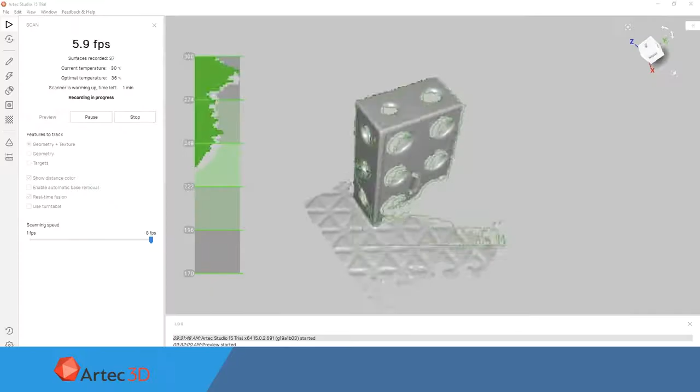Today we're going to take a look at scanning a 1-2-3 block with an Artec Space Spider. So we're using Artec Studio 15 here, which was just released. And what we really wanted to do was do a very simple gauge repeatability and reproducibility study, or a GR&R study, with the Artec Space Spider in Artec Studio 15.

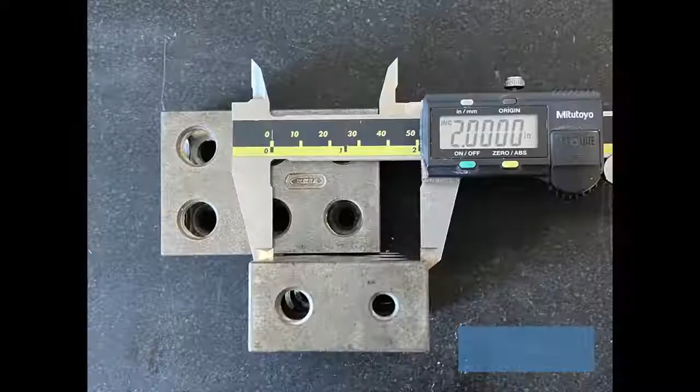So to do this, we decided to use a 1-2-3 block for the analysis. Now, a 1-2-3 block, when it comes to 3D scanners, is one of the most difficult things you can do a GR&R study on because of how flat and how uniform the part is.

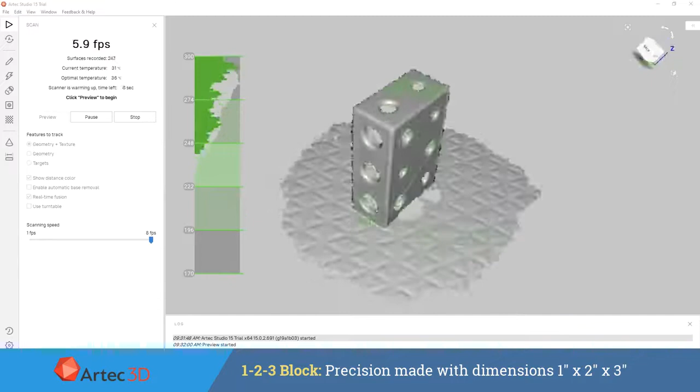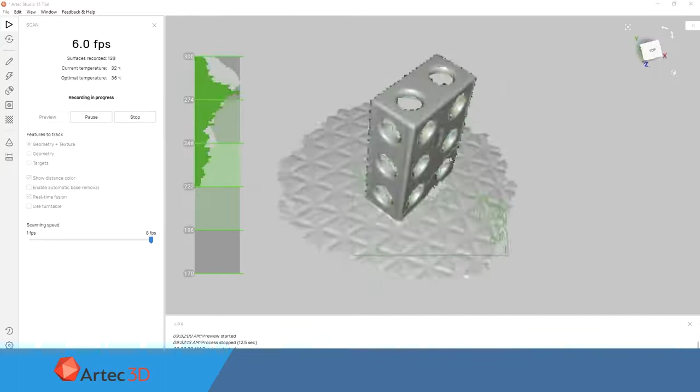Traditionally speaking, with most 3D scanners, this type of part is very difficult to align, as well as very difficult to get repeatable results on because of all the uniform cylinders and the flat planes, and not a lot of external surface geometry that can really be used for referencing when aligning all of the individual frames up from the scan file.

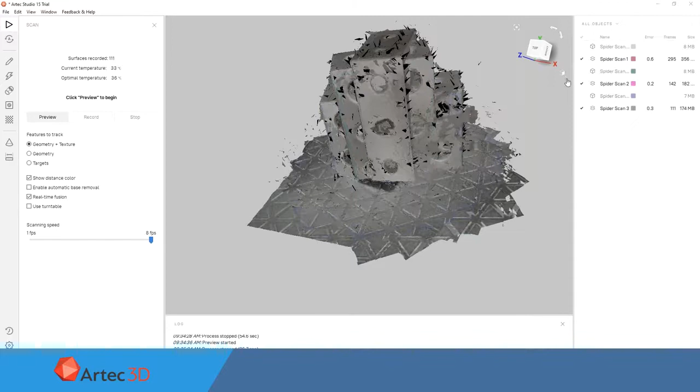So to make this process even more difficult, we are making sure that when we do all of our alignments, we're not using any external referencing data whatsoever. So we're just using the 1-2-3 block here, cutting out any sort of table material that we could use for referencing, and really just focusing on, in the worst case scenario, how is the Artec Space Spider going to perform when we're discussing repeatability and accuracy in its scan data.

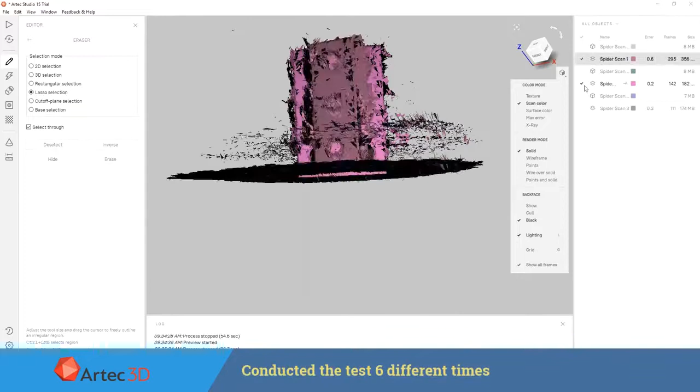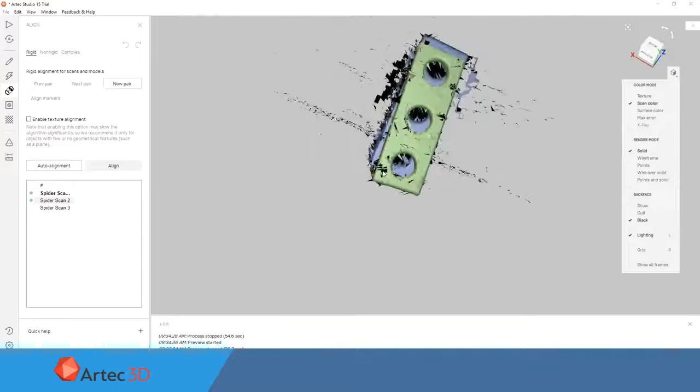So we did this 6 different times, and each time we did scan the part in 3 different orientations, as well as used the same processing for creating our scan files. So the same number of global registrations, the same value inside of those global registrations, as well as our outlier removal processes, and the same resolution in the Sharp Fusion file that was created.

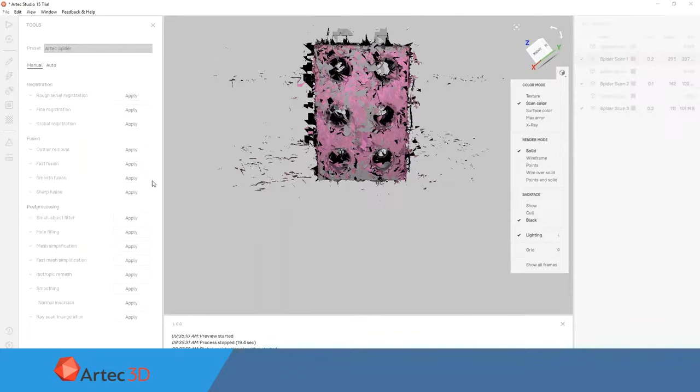So you can see we're just running through here and running our global registration, as well as our outlier removal process to get rid of all of the unwanted noise around our scan file. So at this point, we're going to go ahead and process this out at a 0.3 millimeter resolution, and we'll do this 6 times. However, we're just going to show it once here in this video.

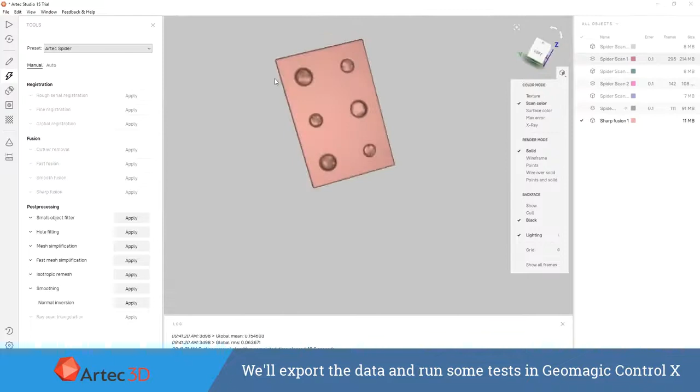We're going to take this part into Geomagic Control X and analyze it a little bit further, taking measurements on the 1 inch, the 2 inch, and the 3 inch mark, putting those in a spreadsheet, and then taking a look at the results. So here we're just going to show the video where we run all 6 of those files so you can see them here live. We are going to speed up through it.

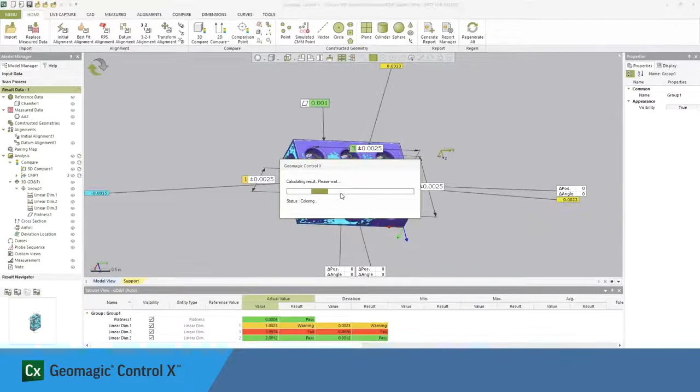And while that's going, we'll talk about a couple of the key factors that we're going to be considering here in this video. So the first one that I already mentioned, which is a 1-2-3 block, is really a great test of alignment performance inside of Artec Studio, as well as the overall accuracy you can achieve in pretty much any sort of scenario with the system.

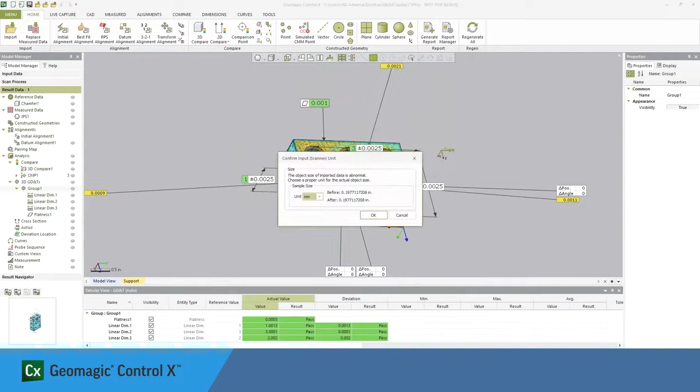The second thing that we're going to focus on is really what are the takeaways from that accuracy, because there's 2 different forms of accuracy that we can consider. One is going to be positional accuracy based off of reference CAD, which will be our 1 inch, 2 inch, and 3 inch values. And then there's going to be accuracy based off of overall scan noise, which we're using our flatness value to drive.

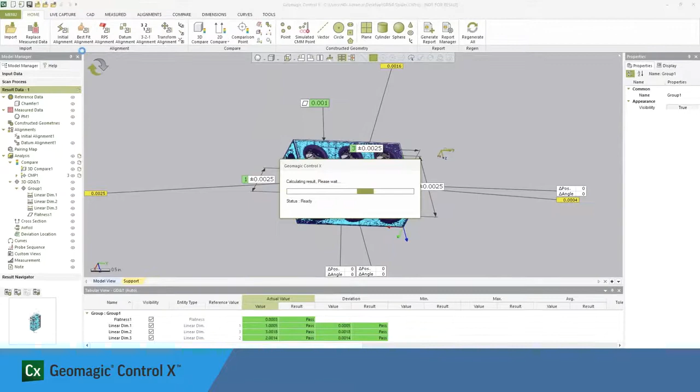There's a few different ways to do this, so don't take this as the end-all be-all message. However, I feel like this is a really good highlight to show the key aspects of performance when it comes to the Artec Space Spider. So let's take a look at the results that we got.

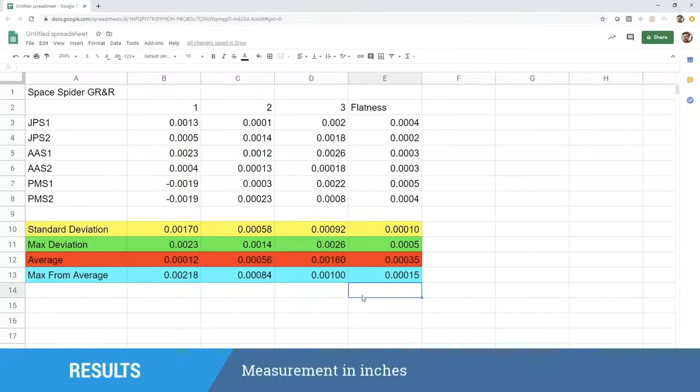And we can see our standard deviation values, our max deviation values, as well as I took an average value and our maximum deviation from our average value, just so that we didn't just primarily use the assumption that the block is 1 inch, 2 inch, and 3 inch. So if we look at our standard deviation values, we can see the highest value that we have on that is right at about 1.7 thousandths of an inch in standard deviation.

For our max deviation value, which would be the maximum deviation from the part if it is precisely 1 inch, 2 inches, and 3 inches, that's right at 2.6 thousandths of an inch on the 3-inch mark. And then if we take our average and look at our maximum deviation from average, we can see the maximum of those values is about 2.2 thousandths of an inch, or 0.00218 inch max deviation.

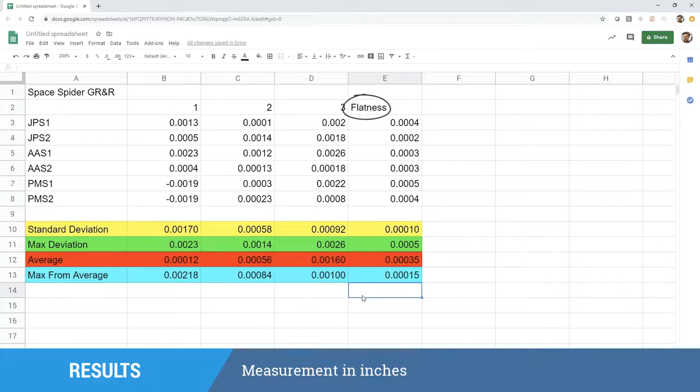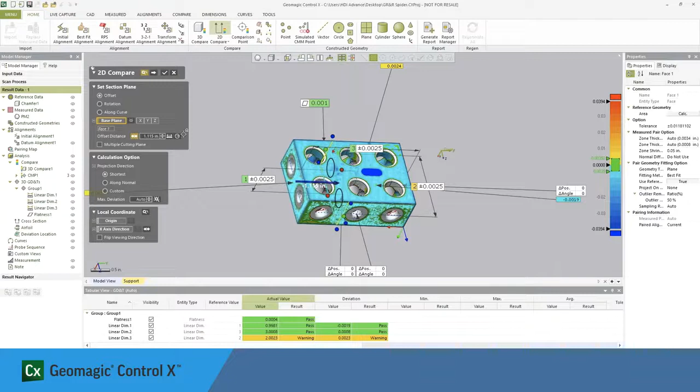However, there's one more value that we threw in there, which is flatness. So let's analyze that flatness value a little bit, because we can see that those values are quite lower than the 1 inch, 2 inch, and 3 inch values. So if we create a 2D comparison here and just take a slice of our part and look at that slice with a whisker multiplier, we can see that whisker multiplier is set to about 50 times the actual value of that noise, just so that we can amplify it to see it.

We can see when we set our tolerance at right at 1/1000th of an inch, that overall flatness value on the two surfaces that are precisely aligned to our part are extremely low. So we're dealing with less than 1/1000th of an inch of a deviation based off of noise of the scan surface alone.

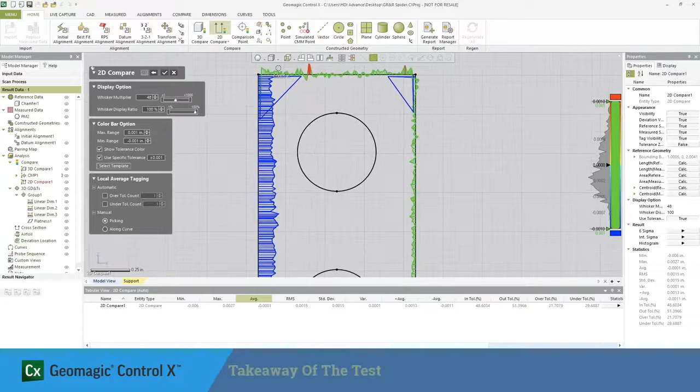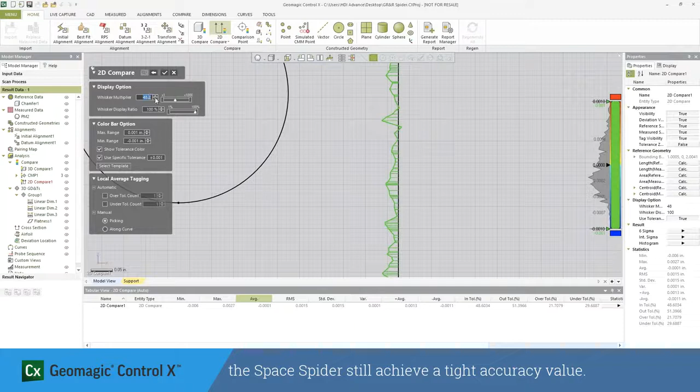So the takeaways from this really are, when you're dealing with a worst case scenario type application, like something such as a 1-2-3 block, where we don't have a lot of geometry that we're working off of in the processes that we use, we still achieve a very tight accuracy value with the Artec Space Spider. And then when we come in and actually look at a surface analysis to really see what the scan quality is like from a noise perspective, we can see that those values perform exceptionally well.